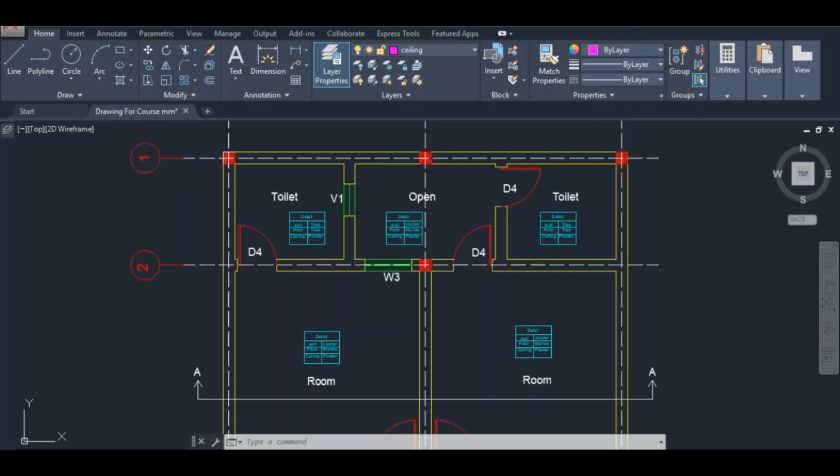Next we need to add here an area, so simply I'll go with the rectangle command and find out the area, like this. Now I'll select this one and the area you can see over here, it is 3.78 meters square. Let me just copy this one, paste it over here, divided by 1000 and again 1000, so it is 3.78 meter square. So the plaster will be in area, meter square or feet square, 3.78.

Let me just give here equal to number multiplied by area. So this is the total plaster that we required for the toilet ceiling.

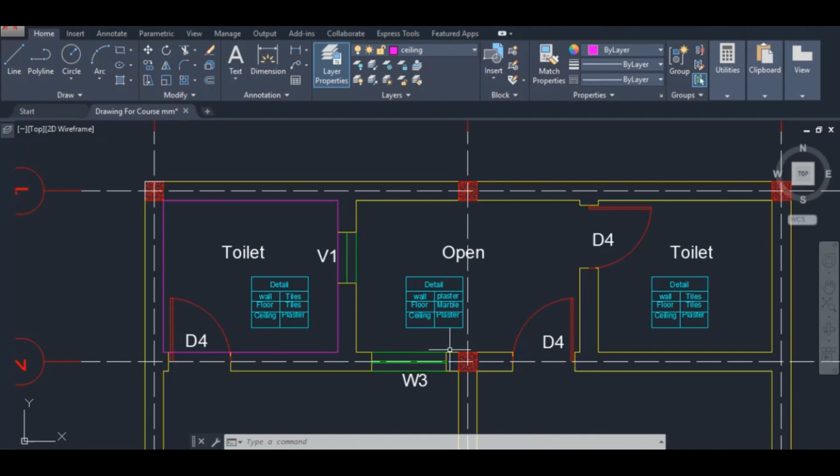Next we need to add here, what, open area, and this is only one in number. Next we need to find out the area, let me just go here, I'll find out the area, so rectangle, start from here up till here. Let me check the area, and the area is 4.86 meter square. I'll write here 4.86.

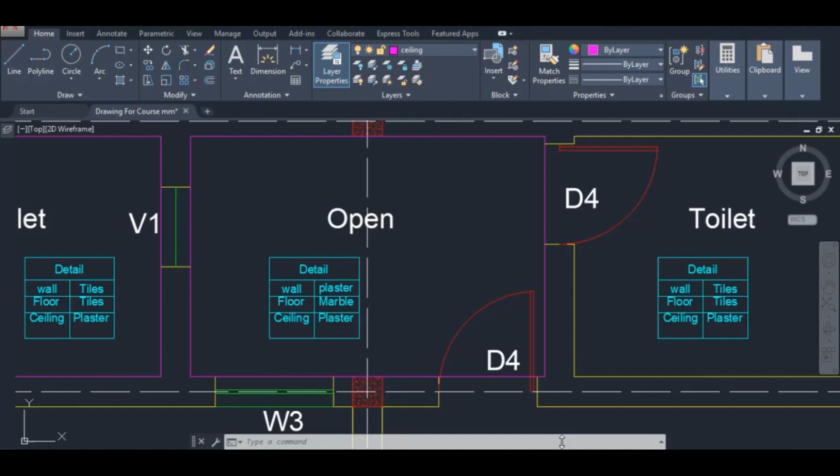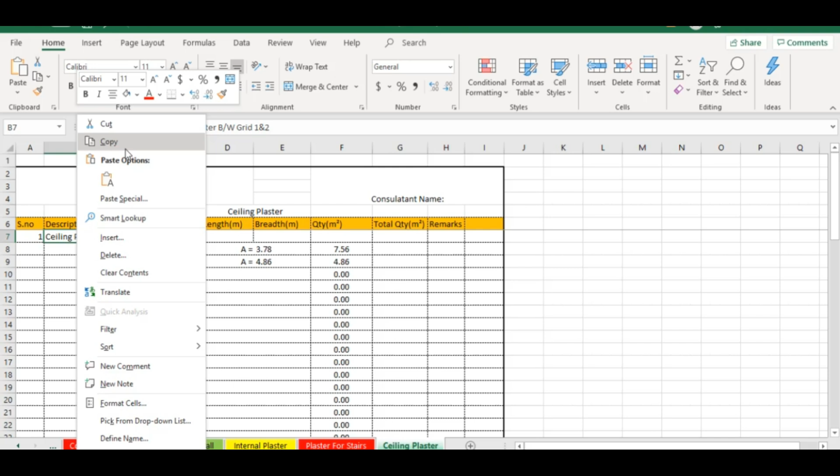Next I'll go here and we have to find out the next portion, and it is in between grid number 2 and 3, and these are two rooms that are same in size. So I'll copy this one, paste it over here, in grid between 2 and 3. Next we have rooms, and these are two rooms that are same in size.

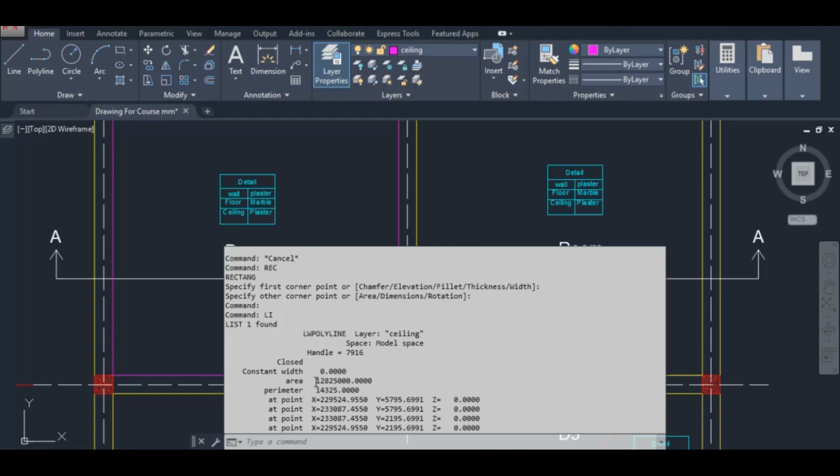Let me just check the area for these rooms. I'll start from here up till here. I'll select this one, list command, and the area that we required is 12.82 meter square. Let me check it in calculator, copy, paste it over here, control plus V, divided by 1000 and again 1000, and it is 12.82 meter square. So I'll write here 12.82 meter square.

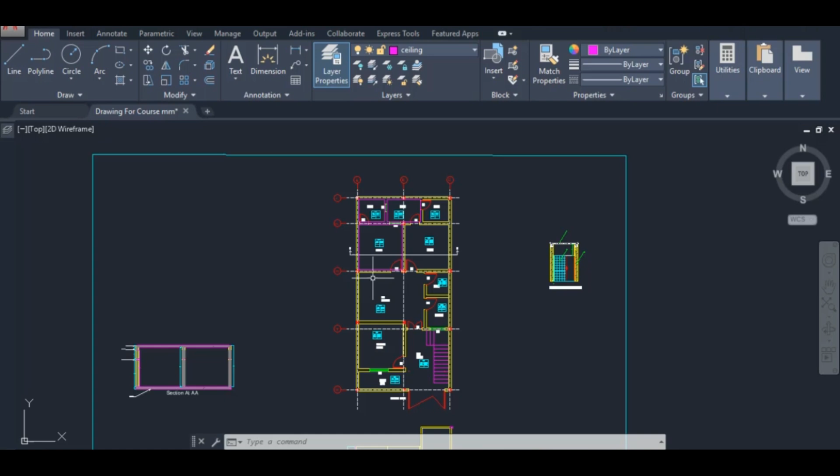Now next we need to find out the next portion, and it is in between grid number 3 and 4. So in this area we have TV lounge, store, and the kitchen. Let me just copy this one, paste it over here, and I'll write here ceiling plaster in between grid number 3 and 4.

So first what we have, TV lounge, and in number it is only 1, and then next we need to find out the area.

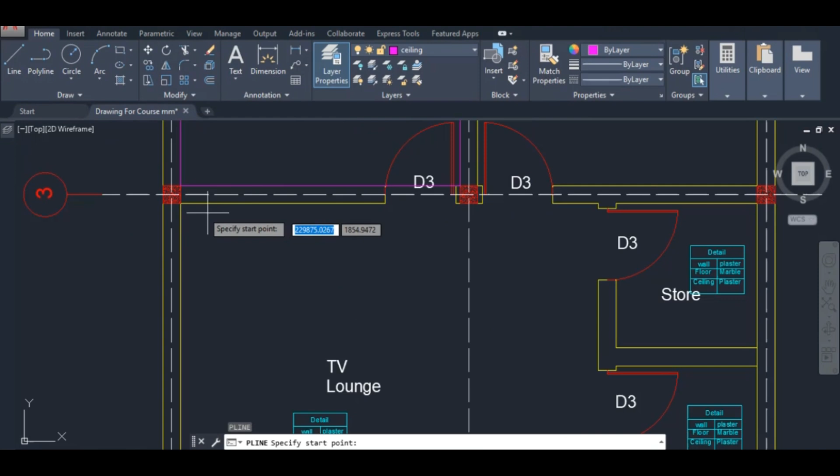So with polyline command I'll find out the area of this portion. I'll start from here up till here, then this portion, and then this, up till here. Now let me check the area, and with list command I can check the area, and the area is 21.55 meter square.

You can just divide it by 1000, and again by 1000, to convert it into meter square. The value will be in millimeter square because this drawing is in millimeter.

Now next we need to find out the store, store 1, and the total area for store. I'll go here with the rectangle command, up till here, list, and the total area is 3.24 meter square.

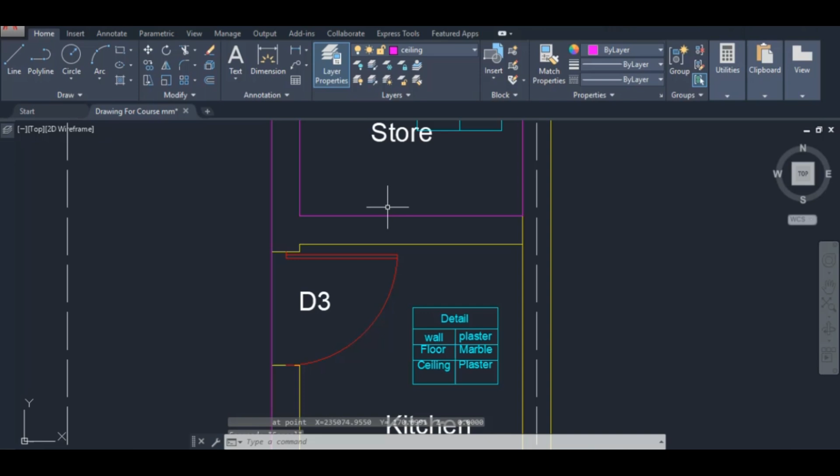Next we need to find out the kitchen, kitchen 1, and I'll write here area. Let me find out the area from here with the rectangle command, starting from here up till here, and with the list command I can check the area. This is 4.32 meters square.

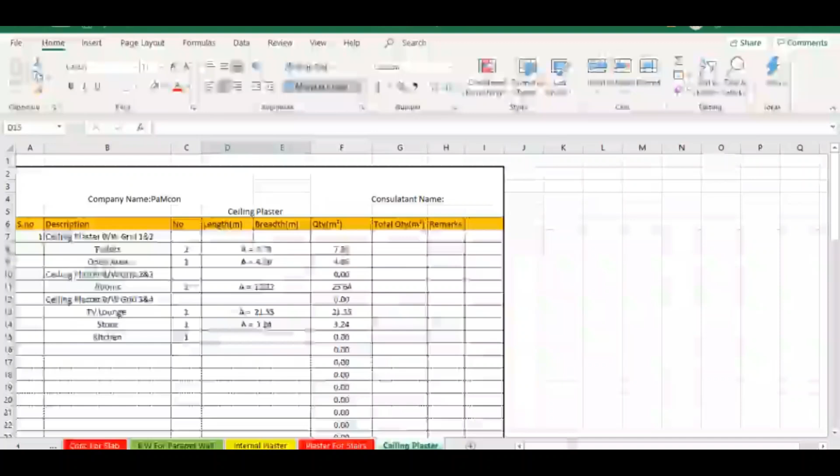Now next we need to find out the next portion, and it is in between grid number 4 and 5. So I'll simply write here ceiling plaster between grid number 4 and 5. Let me double click over here, 4 and then 5.

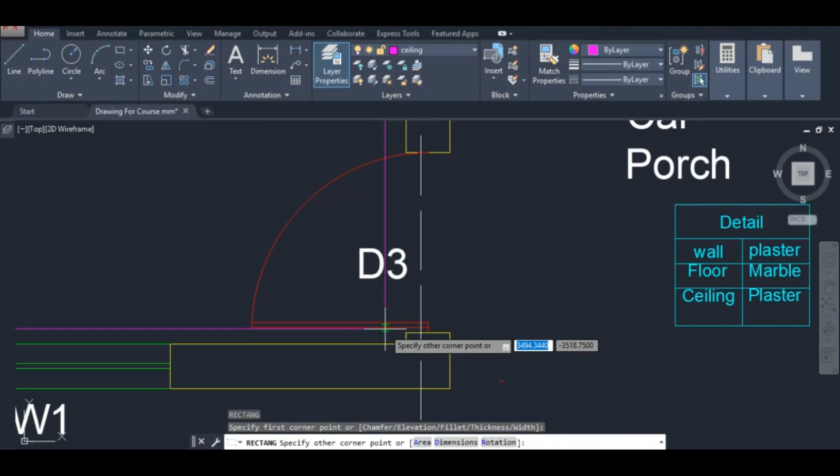Next we have the drawing room in this portion, only one. Next we need to find out the area of this room. So rectangle, start from here up till here. Next with the list command I'll find out the area, and the area is 12.96 meters square.

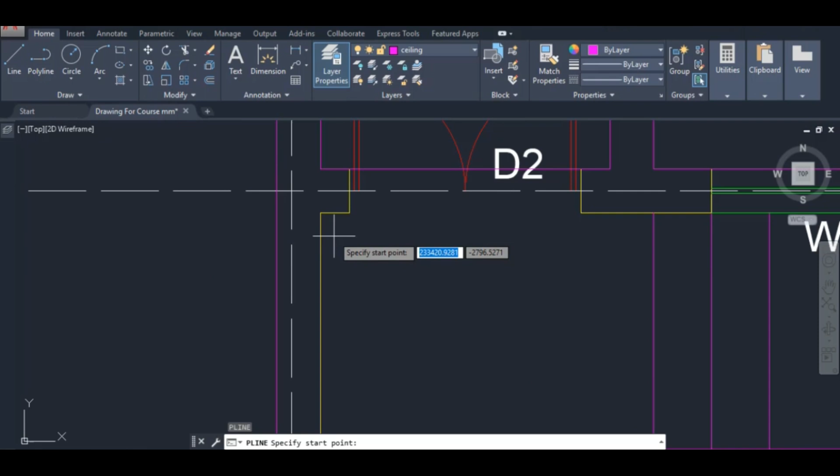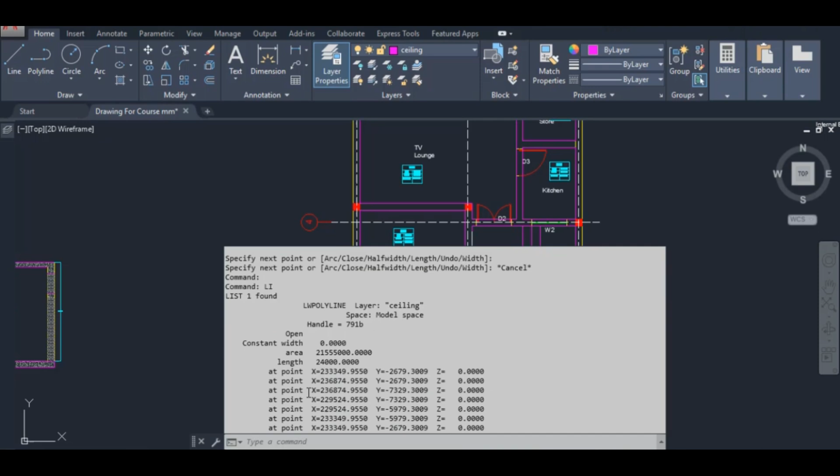Now next we have to find out the outer area as well. You can see here we have this outer area. So we have to find this one. Let me include it over here, outer area of slab, only one. Now we have to find out the area.

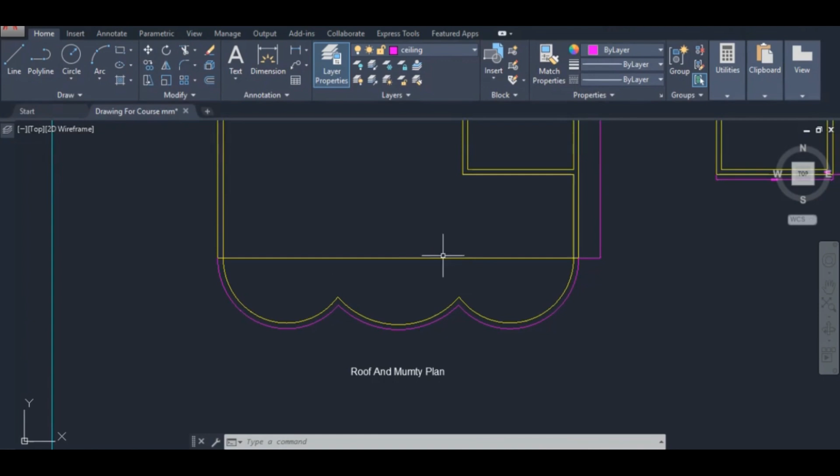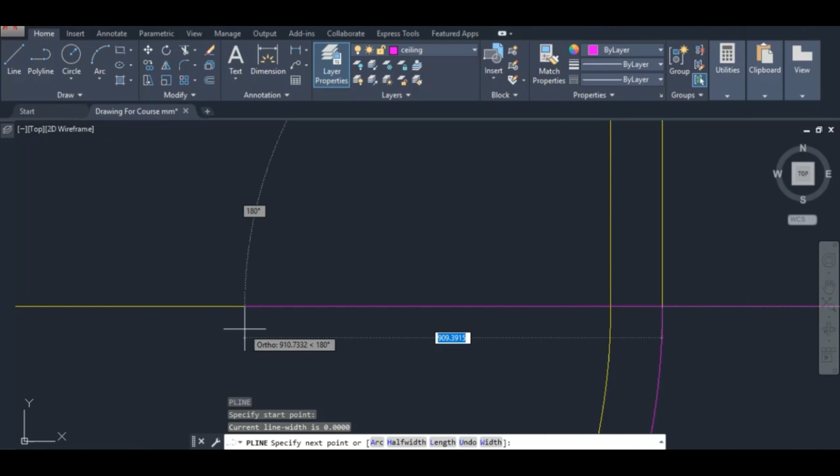Through polyline we can find out this area. In this case, we have just this line over here. Let me draw a line in this direction, and we'll join these lines so we can find out the area. With the polyline command I'll start from here, go here, and it will be up till here, like this. Now I'll join both of these with the J command, hit enter. Now you can see it is a single polyline. With the list command I'll find out the area, and you can see we have the area, it is 10 point something.

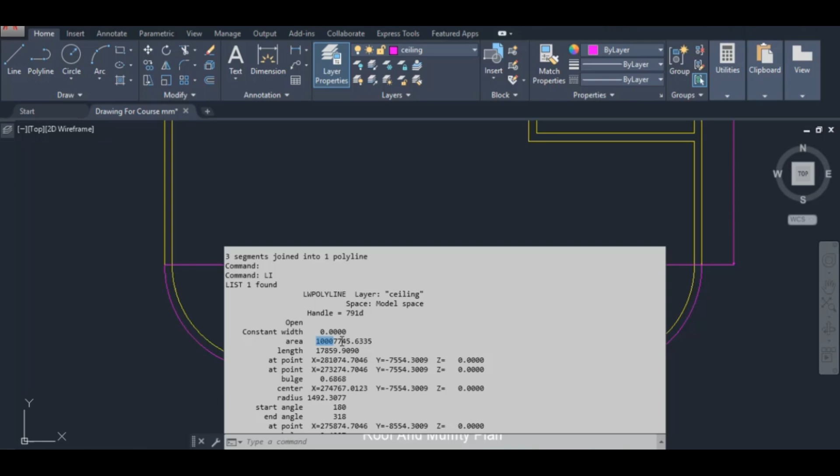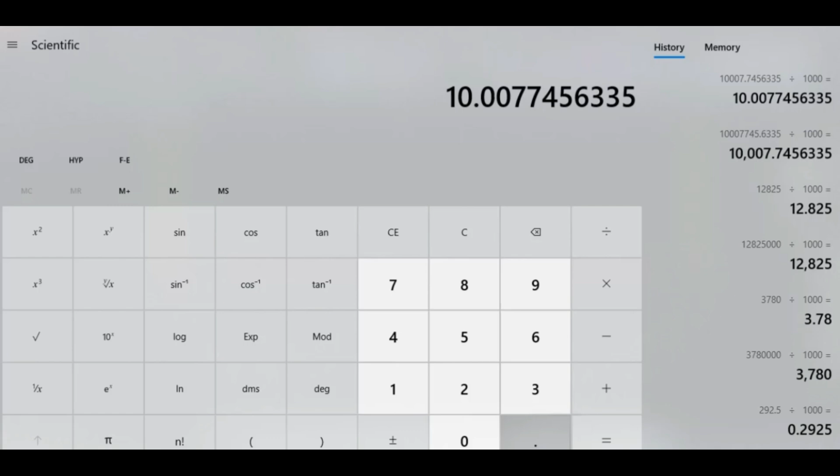Let me copy this one and find it in the calculator. I'll paste it over here, divide by 1000 and again by 1000, and it is 10.007. So I'll write here 10.007, so it is 10.

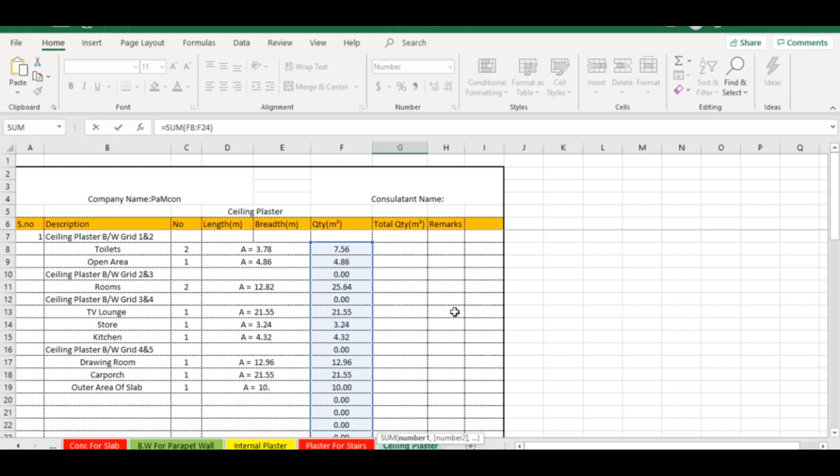Next you can see over here we have the total plaster in ceiling, which is 111.68 meters square. This is the total plaster required in the ceiling. So this was the procedure to find out ceiling plaster. Hope you understand this session. We'll see you in the next.